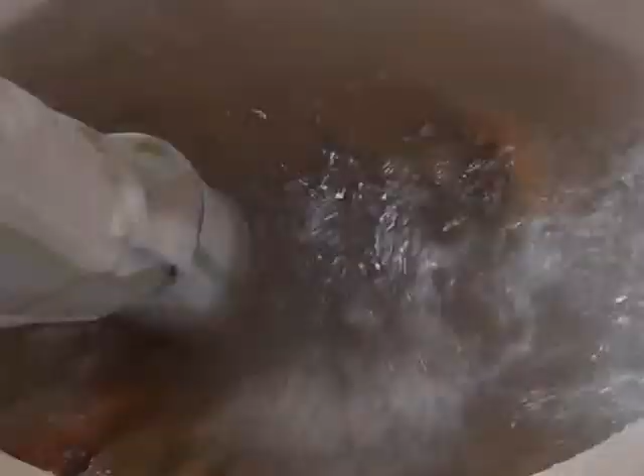About 71% of the Earth's surface is covered with water. However, 97% of this is seawater, 2% is locked in polar ice caps and glaciers. The remaining 1% of water is available as fresh water. There is a dire need to conserve every drop of water.

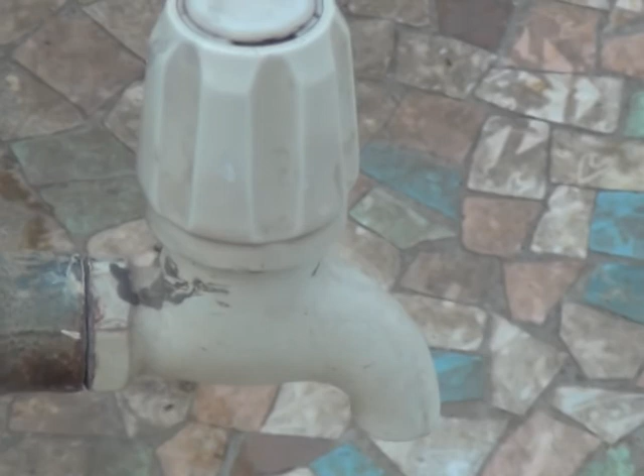Mumbai has a population of 12 million. Over 30% lives in slums, and the density of population is 22,000 per square kilometer. This leads to a shortage of drinking water of 800 million litres per day. The water supplied to Mumbai from various sources is about 563 million gallons per day.

The monsoon precipitation is collected in 6 lakes and supplied to the city through the year. The BMC manages to supply between 70 to 75% of the city's water needs. The groundwater table in Mumbai is fast depleting. It is already over 100 meters deep at many places. There are about 7,000 bore wells exploiting the water table, but there is hardly any charging in the ground.

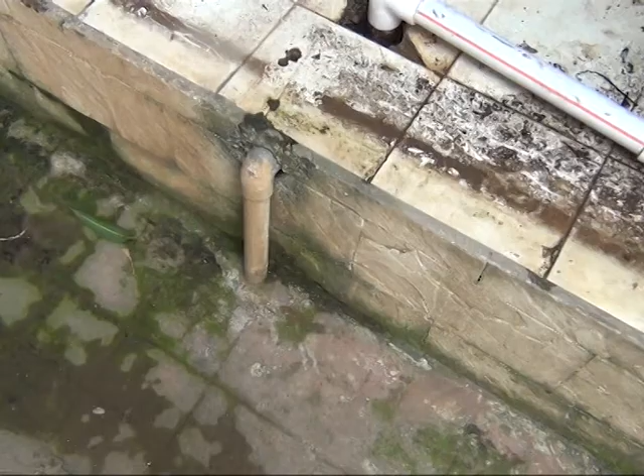Lowering of the groundwater level is causing salt attack. This means that the seawater is seeping into the soil and making the groundwater useless for drinking. On the other hand, due to global warming, the sea will increase in years to come. Therefore, it is high time we take all types of water conservation measures on a war footing.

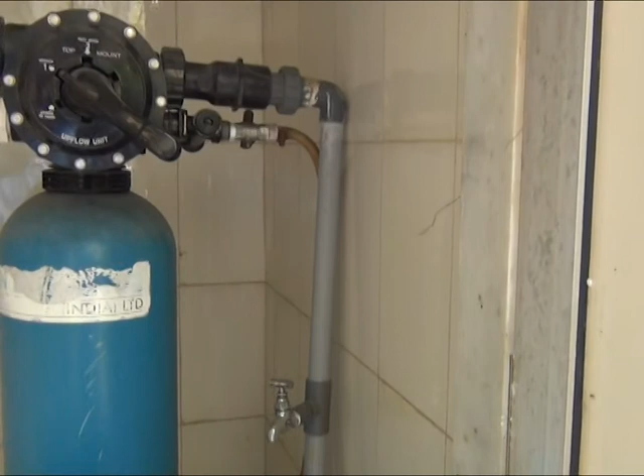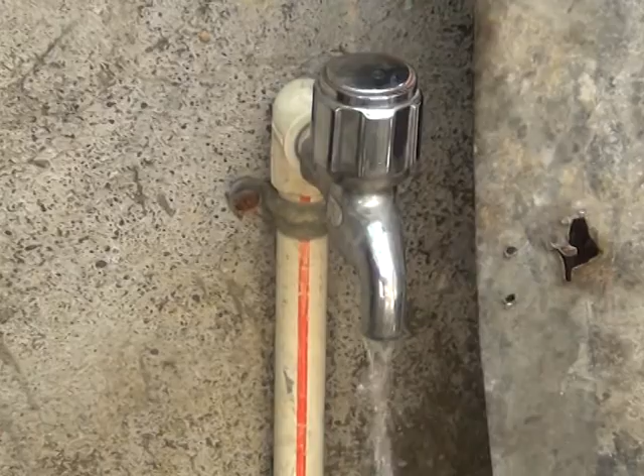Consume less, reuse and recycle, stop leakages. 650 million litres of water leaks from pipelines in Mumbai every day. Above all, there is no justification at all for wasting the scarce drinking water on non-drinking purposes, which accounts for over 40% of the total water consumption.

The practical, low-cost and high-yield conservation methods of water in order of priority are rainwater harvesting, grey bathroom and wastewater recycling. You hold as much of rainwater as possible, don't let it go to the sea, and instead charge it into the groundwater. In Mumbai, something like 7,000 to 8,000 bore wells are just taking out the water, but nobody is charging it back. So as a result, the water table is going down and down and down.

I think at some places it has already reached 300 feet. And at this rate, if it keeps on going down, maybe in a few years' time you will not have subsoil water. You cannot take out from 1,000 feet. Okay, so that is going down. On the other hand, whatever rain falls here, and you have 1 to 2 meters of rainfall, most of it goes out. It's drained into the sea. If you can arrest even half the quantity of that water, put it in your reservoir down below, use it whenever you want, you will never be short of water.

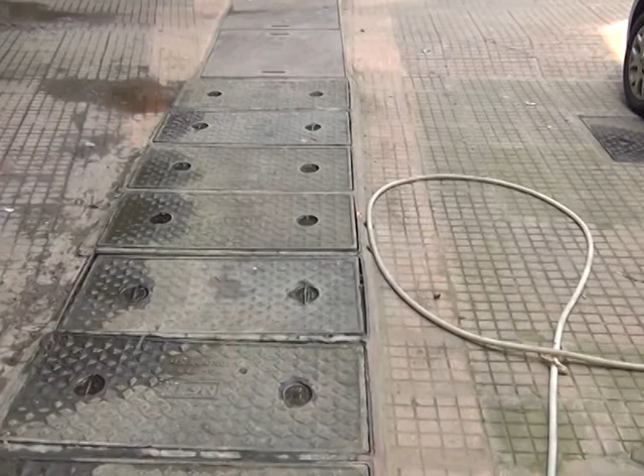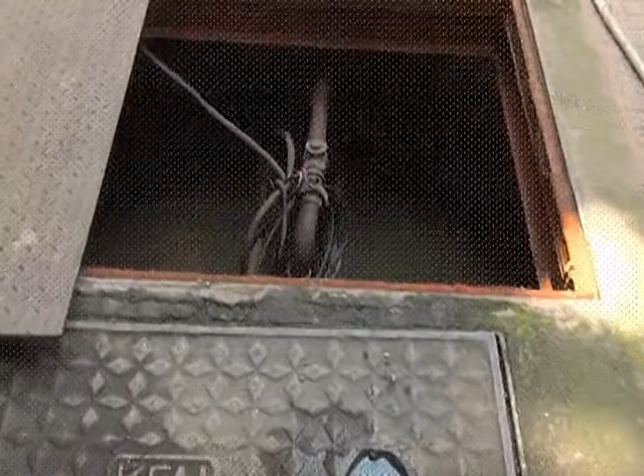Collect all the rainwater which falls on the roof as well as in the compound and around area, and we bring it down to this tank. Now, to let water seep into the groundwater, you have to have a bare surface. And therefore, we have put a channel. It's a 70 feet long channel, 6 feet deep, and the bottom is bare. It has just sand, pebbles, etc. So whatever water flows down into this channel goes down into the earth and recuperates the water table. That is one. The second is that similarly all the compound water falls into this channel.

Now it creates one problem, that if it is water only from the roof, then it can be clean. But we are collecting from the compound and from the road and everywhere. So therefore it's not clean. If we let that go on our soil, it tends to choke that bed, and within about a year or 2 years, it will not let water seep into the ground. So the efficiency goes down. Therefore what we do is, first we pass it through a filter. From one chamber it goes to the other filter. It again filters. Then it goes into the bores, 6-inch wide bores, going 100 feet deep. So the rainwater also goes down.

Now you might ask, if you are putting that dirty water in and you are again taking out that water, it should be dirty. No. Through the bore we just put it up to 100 feet. But the water from the bore well which we are taking out is from 200 feet. So from 100 to 200 feet, this water is sort of distilled and filtered again.

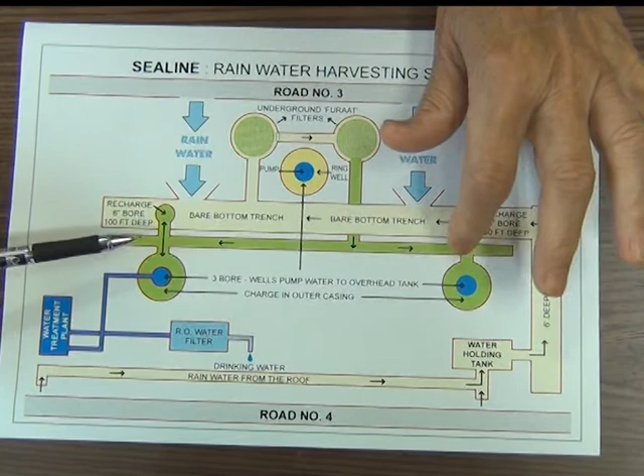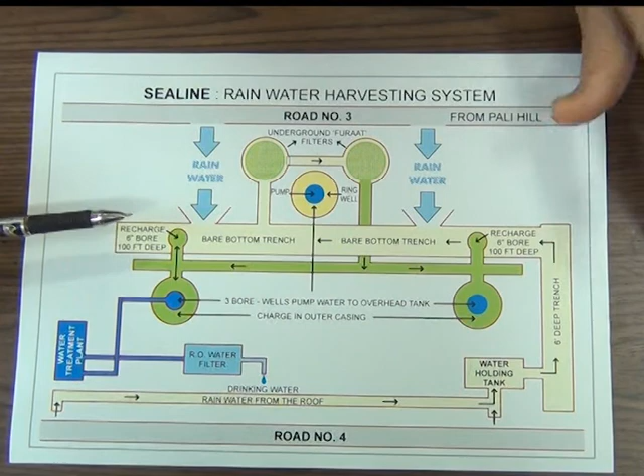The water from the roof comes to this tank. From this tank it goes to the channel. This is a 70 feet long channel, 6 feet deep, bare bottom. And from there it goes to the filter, back to the filter, and then to the bores and the gaps of the bore wells. So we have 3 bore wells, 3 gaps here, 1 channel, and therefore the rainwater keeps going down into the groundwater. We call it charging. So we charge more than what we consume.

Preserve and conserve the natural resources to build a better tomorrow. If we each do our part, we can work towards turning the tide around.